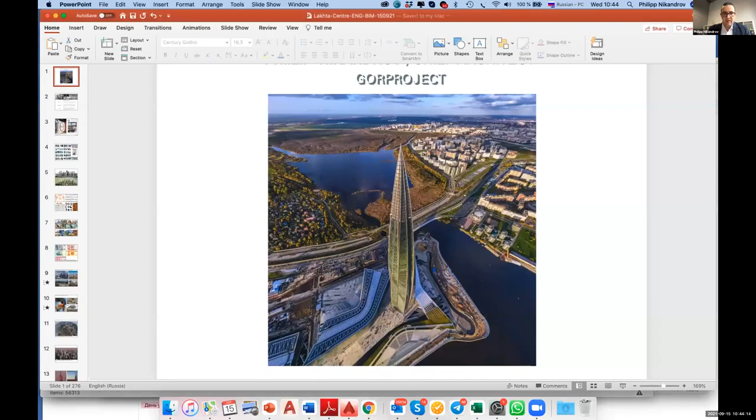Let me introduce myself. My name is Philipp Nikandrov, and thank you to the chairman for the introduction. I represent a company, Gorproject. This is a group of companies. We are one of the leading Russian design companies. Over 300 designers, architects mainly, and structural engineers, MEP engineers. But also we have daughter companies, United Facade Company, dealing with complex facade design. And also one of our daughter companies, BIM Academy, which was established quite a long time ago.

We're a relatively young company. We've been on the market over 15 years, but we were one of the first companies in Russia introducing BIM technology in the design process. And our BIM Academy was involved in many educational projects. So mainly it's educational, but it also helps us a lot to design and teach our colleagues in-house. But also we invested a lot in popularization of tall buildings and high-rise buildings.

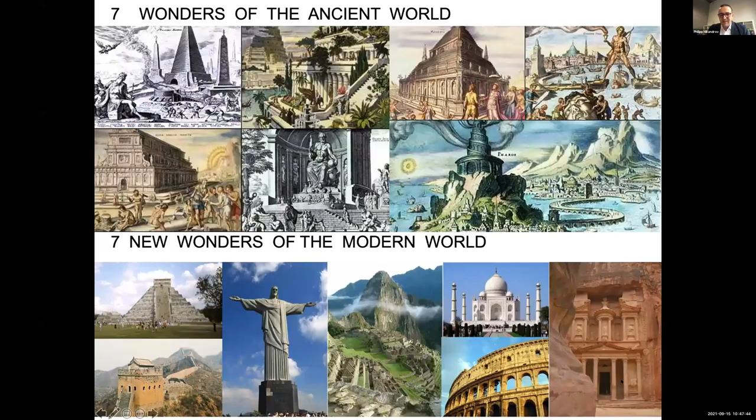Icon, of course, is a symbol. So when we call a skyscraper iconic, it's a symbol, like the 7 wonders of the ancient world, or the 7 new wonders of the modern world, and many wonders in many countries. And now it's about size, about height, and skyscrapers are definitely the flagships of the construction industry, and many nations are proud of their icons and publish them on banknotes, postcards, and stamps.

And of course, sometimes it's a target. We just recently remembered the great tragedy of the September 11th attack 20 years ago. Skyscrapers were the target, similar to the Temple of Artemis at Ephesus, because skyscrapers are such strong and powerful symbols of ideology and economics and nation, the power of an empire.

But also, skyscrapers are just a typology of buildings, and most skyscrapers and high-rise buildings are built not as a symbol, just for money, to get profit. But on this skyline of skyscrapers, some of them are higher and more significant, and they are landmarks, and they have to be vertical dominants amongst other vertical dominants. So basically, when you have high-rises all over the city, like Hong Kong, Shanghai, Dubai, some of the towers are more significant, and they have to be treated as symbols.

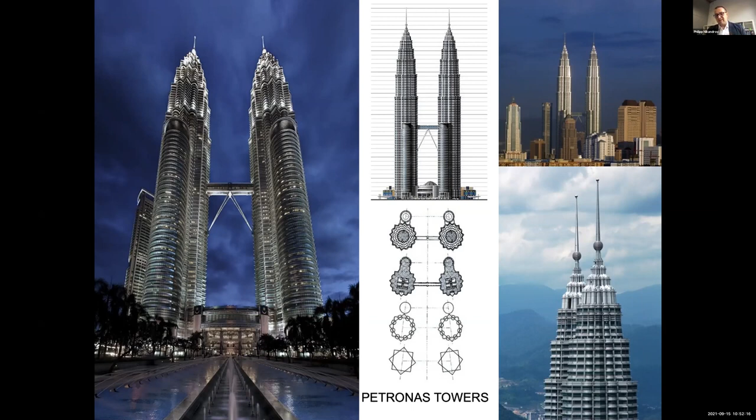In this building in Kuala Lumpur, the Petronas Tower, a symbol of contemporary Islamic architecture based on an Islamic pattern in the plan, it's a very ornate plan, but it's repetitive. The beams are similar, the columns are similar, the floor height slab to slab. So it helps to prefabricate, design quickly and build quickly.

But at the beginning of the 21st century, you have buildings with more difficult shapes to design and build, more complex, with much fewer repetitions. Some of them are mega skyscrapers like these two, Burj Khalifa and Kingdom Tower. But in Burj Khalifa you also have tiers with repetitive design, one above another, and again, repetitions help to design and build.

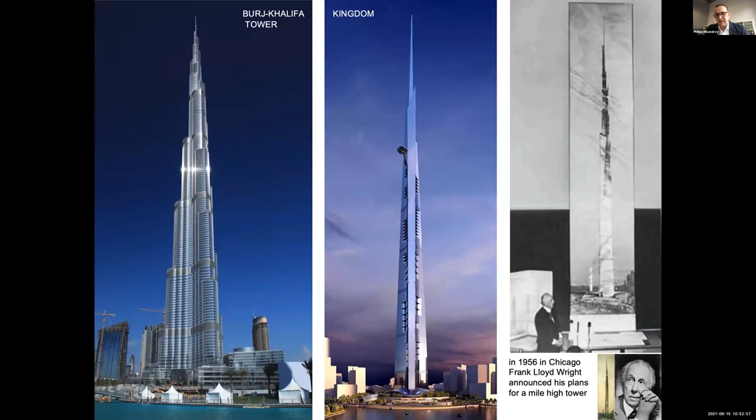The tallest 20 towers in the world, what we call megatall, are above 600 meters, mostly built in Asia, in China and Dubai, the Middle East, but none of them is in Europe. European towers are smaller. Most of them are in Russia, in Moscow or St. Petersburg, but also London, the Shard, and Frankfurt.

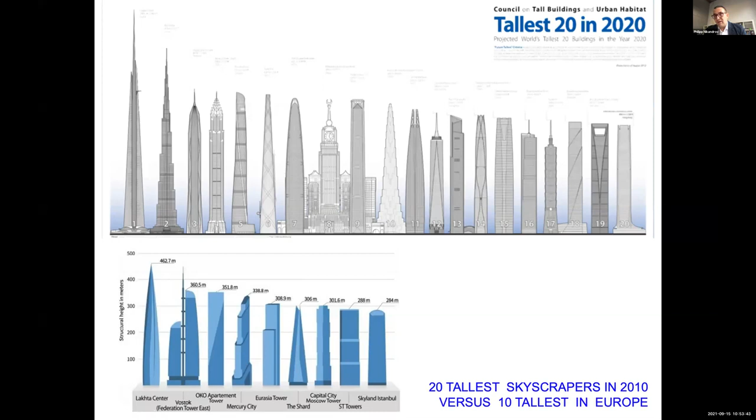In Russia we have our tradition of high rise, and we entered the height race in the 20th century with the Palace of Soviets, which was supposed to be 400 meters tall. Construction started in 1931, at the same time the Empire State Building was finished. But only the basement and lower levels, maybe the first floor, were constructed when the Second World War started. Construction was terminated, and the structure was dismantled for fortification uses.

The second landmark, actually successfully finished, was the University Tower, which until the 21st century was the highest tower in Europe, 240 meters. And the Ostankino TV Tower, 540 meters. For 9 years it was the highest structure in the world, built in 1967, which is 54 years ago.

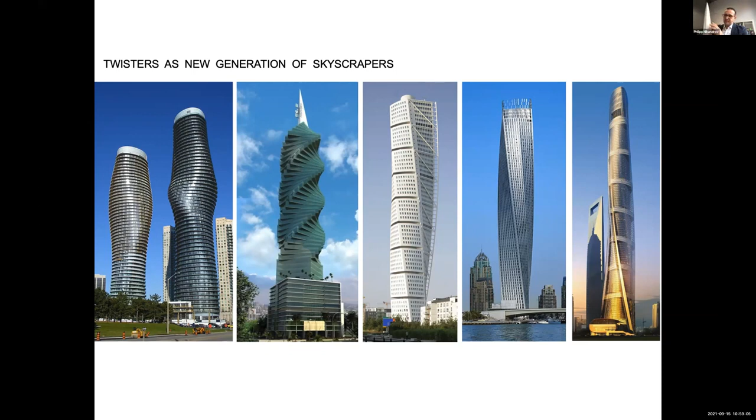Yeah, it's quite a bold twist, and as I said, it's the new generation of skyscrapers called twisters that we can design now because of BIM, because of building information modeling. We have these softwares to design it quickly and build it quickly. Before, without BIM, it would take many years, maybe 10 years to design, and a very long time to build. So this is a new generation, because we can build this complex geometry like Lakhta Center, which I will be talking about in a minute.

Again, Evolution Tower was quite simple. It's a very complex shape, but it's a simple idea. It's a straight vertical core and 8 columns surrounding the core and 4 corner columns. It was difficult to build the corner columns with a special shuttering design, but as you can see, it's a repetition. The same floor plate rotates 3 degrees, and it's simple. But again, you have to design each floor separately, and the reinforcement of each floor separately from other floors. So there is a repetition, but it's not that straightforward.

Lakhta Center Tower in St. Petersburg is a more complex shape. If you look, this is a scale model I have in my hands. It's an extrusion vertically, but twisting, tapering and bowing. So it bows and it gets into the pinnacle, into the point. All the mass gets concentrated in one point, similar to historical domes and spires.

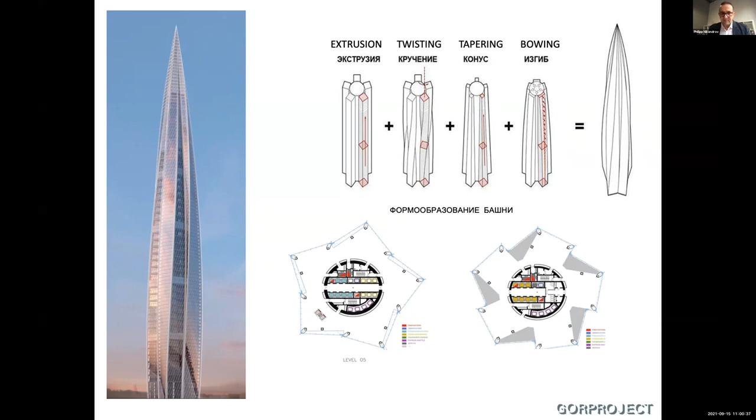These are some images of the completed project. It was finished a couple of years ago, but it's still under construction because of its large scale. Phase 2 is under construction: the embankment, surroundings, landscape and fit-out works. So it's not yet opened for operation, and the project took, of course, a long time. This is a night image with architectural lighting, and some of the aerial images that you can see.

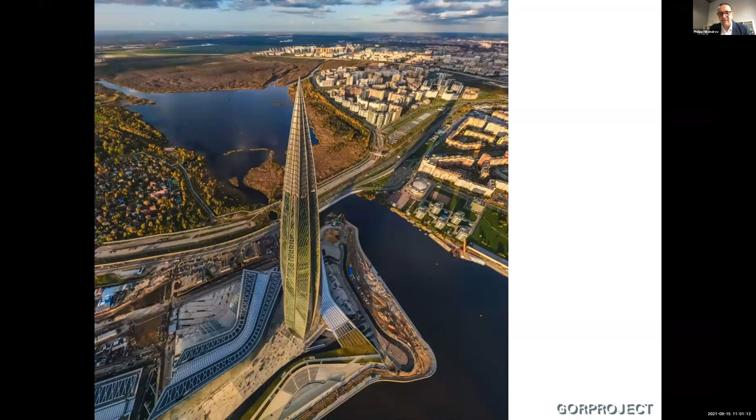Overall area is about 400,000 square meters, and gross lettable area about 150,000 square meters. The overall height is 462 meters, which makes it the highest tower in Europe. The main purpose is offices of Gazprom, the headquarters of Gazprom, moving from Moscow. But there are many other functions in the complex, including a science museum, an educational center with a planetarium, a quite unique 500-seat transformable multipurpose hall, and various supporting functions like fitness, retail, restaurants, and of course underground car parking for 1,800 car spaces.

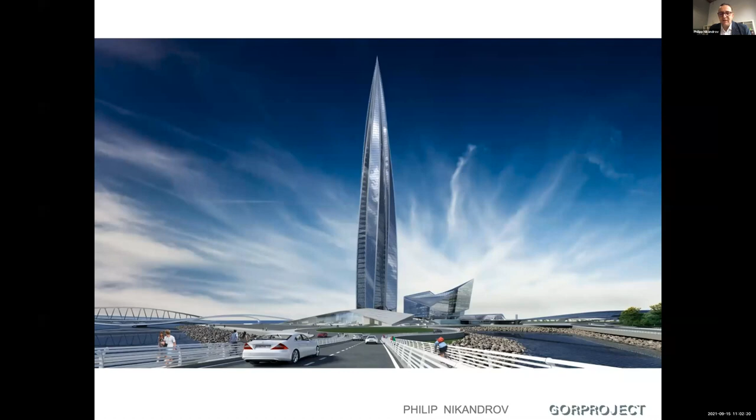One of the things we are proud of and quite remarkable: the tower was certified LEED Platinum by LEED, which is one of the major ecological green organizations responsible for certification of green buildings. The tower received platinum, which is the highest degree, and the base podium buildings around it, called the Lakhta Center multifunctional building, received gold.

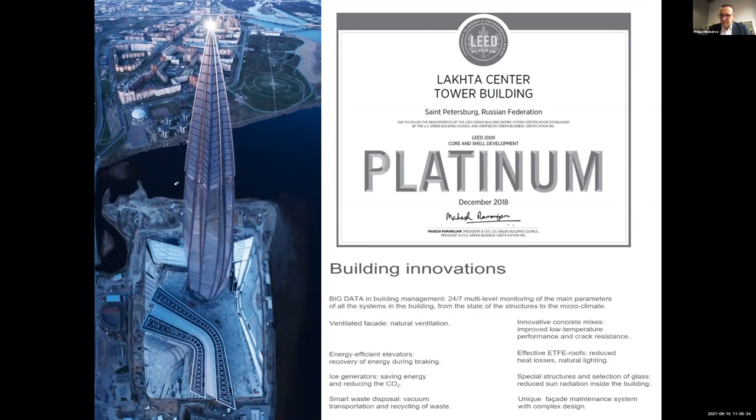Big data in building management is multi-level monitoring of all parameters of the building and state-of-the-art engineering. We have a double skin ventilated facade with natural ventilation, and energy efficient elevators which recuperate and recover energy during braking. Also, we have ice generators saving energy, and a very smart contemporary waste disposal system with vacuum transportation and recycling of waste. And we have a lot of innovation in the facade and in using an ETFE roof, which is a synthetic material, not glass. Of course, the facade management system, BMU, which we basically had to invent because it was not on the market, to service this very complex shape of the tower.

It's a view from the top. But the history of the project is quite interesting. Started in 2006, Gazprom established an international architectural competition, inviting 6 teams, famous architectural studios like Daniel Libeskind, Jean Nouvel from France, OMA from Netherlands, Herzog de Meuron, Switzerland, and Fuksas Associati from Italy, and RMJM London from UK.

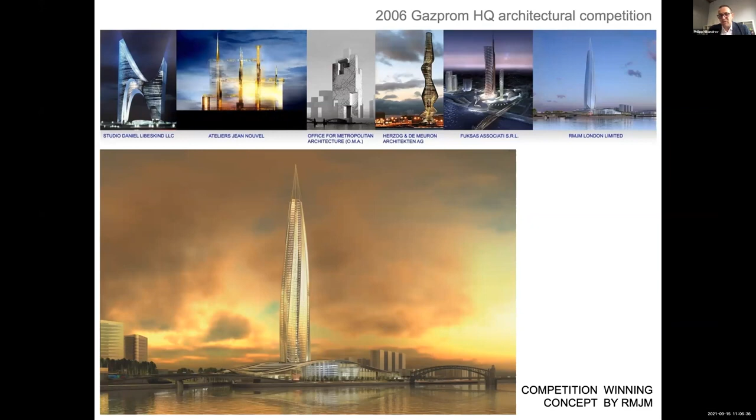And I was director at RMJM at that time, and was a chief architect in this competition entry and later. But the site for this project was different. It was closer to the center, 5 kilometers from the city center, on Okhta. Later the project has been replaced. So if you look at St. Petersburg, this is a St. Petersburg map or scheme diagram showing the boundaries.

St. Petersburg includes actually 9 cities and 21 villages, and the central St. Petersburg, which is marked up as red, historical, is a preservation area protected by UNESCO, a UNESCO World Heritage. And the actual site is here where Lakhta Center was built, but the original site was in there, so it was slightly closer to the center of St. Petersburg.

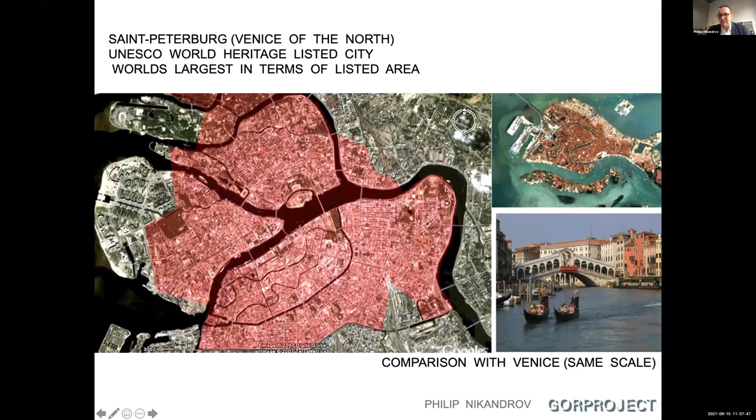And the center of St. Petersburg is really huge. So if you compare the historical center of St. Petersburg, which is marked up red here, to Venice. So this is Venice. It's a real site. The entire Venice is much smaller than the preserved St. Petersburg area. The first site was located in here,

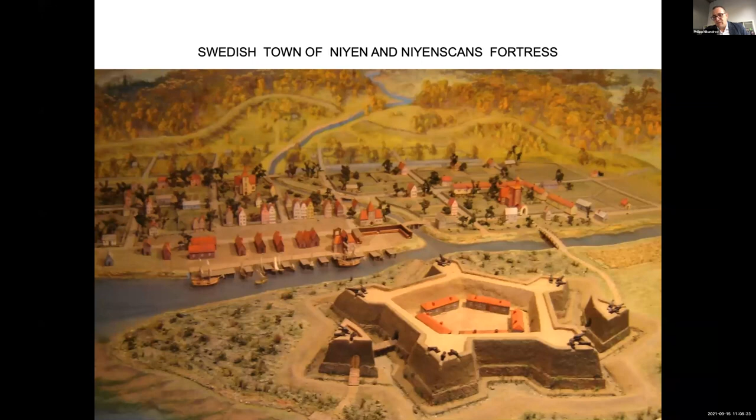but it was actually at the place of an ancient Swedish fortress, and the later fortress of 16th and 17th century called Nienschanz, which was demolished by Peter the Great. So some of the archaeological remains are there, and this was one of the reasons of objections to build here on this peninsula. But actually the shape of the fort was inspiration for the design.

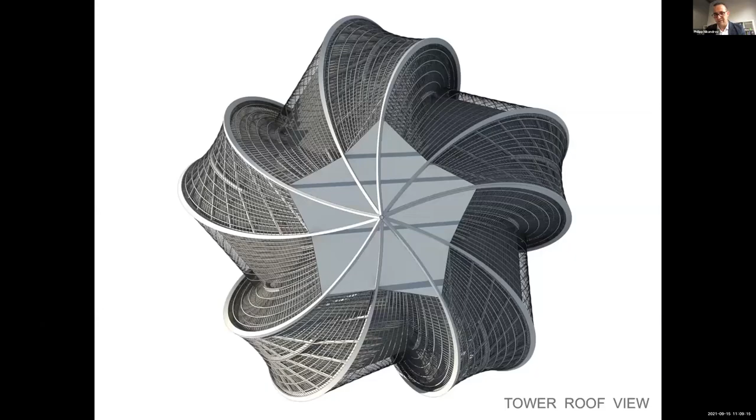In general, the silhouette of the project is a flame. The flame is a logo and symbol of Gazprom, of course, the blue flame. And we have a flame.

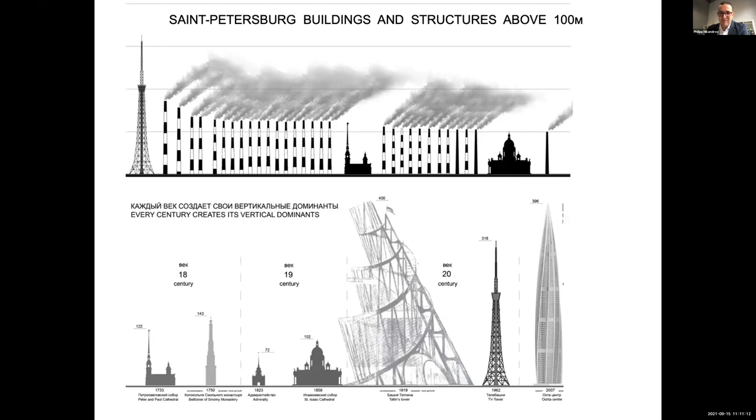In St. Petersburg, we have many vertical dominants, and most of them are not very pleasant, like these chimney pipes. This is a big industrial city, and we have port cranes, but also a TV tower, which is over 300 meters tall, and in the center we have domes and spires. So St. Petersburg has a different skyline, and it was important to have the major symbol be the tower rather than a TV tower or chimney pipe.

So the project actually relocated 9 kilometers to the west due to UNESCO demands. The major concern was the proximity to the Smolny monastery over here. So the tower moved far away. It is now in the Lakhta district in the northwest of St. Petersburg, and it forms a new marine facade. You can see the football stadium here and a new suspended bridge.

And this is a new district, and the Lakhta Center is a generator that will generate developments in this new part of the city. Of course, the port as well. The new marine facade includes the new passenger port for liners arriving to St. Petersburg. And the first thing that meets you in St. Petersburg would be Lakhta Center Tower, which is a flagship and a lighthouse on the Gulf of Finland.

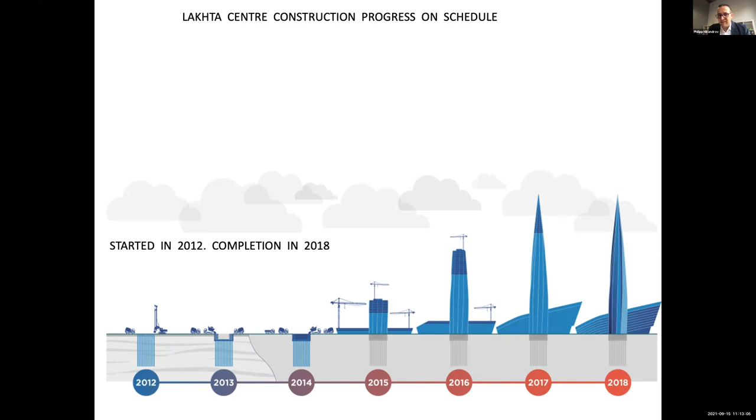So after relocation of the project, construction took about 6 years to complete the envelope, the structure and services by 2018, with some breaks, changing the main contractor in 2014 and 2015. Originally Arabtec and then Renaissance, a Turkish company, as main contractor, and Arabtec built foundations with Bauer Construction from Germany, in 2012 and 2013 finishing the basement foundation of the tower.

The location of the project actually works in the antiphase of the traffic flow. So it actually helps to reduce the traffic flows in rush hours, in peak hours in the morning and evening time.

Because of the location, this is over 2,000 car spaces, but not in the city center. It's actually outside. So the cars from the city center in the morning would go to the outskirts, which is in the opposite direction. So it actually helps a lot to reduce the traffic problems in St. Petersburg.

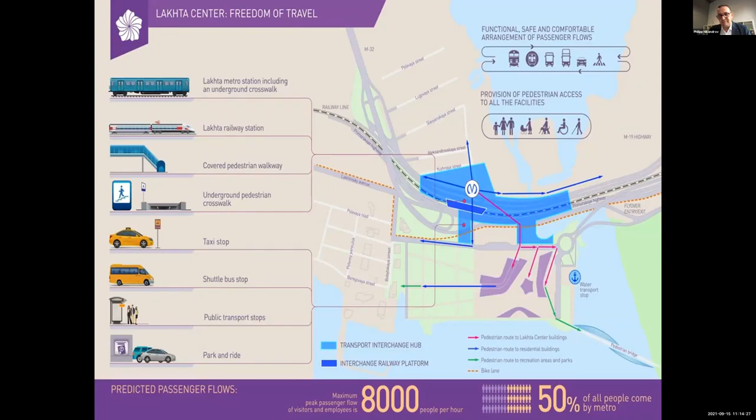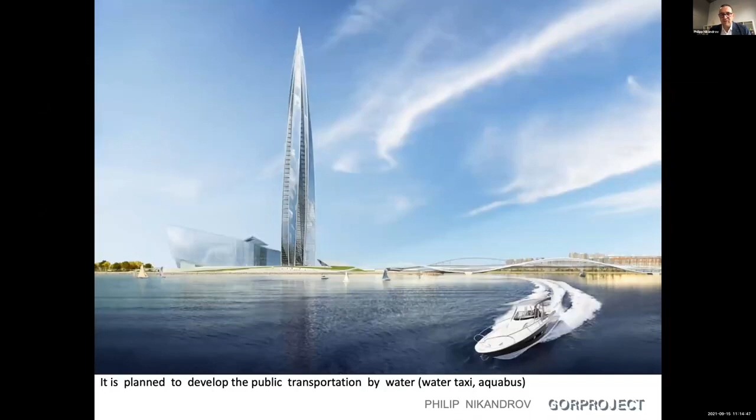But potentially it's in a plan to arrange a transportation hub, including metro station and railway station, and also using water transport, like water taxi, and of course various modes of public transportation that include buses and metro in the area. And we also designed this pedestrian bridge, but it's still the dream to connect the park and the new construction site together, and use this water transport for the future.

So we talk about construction and the design, but the public uses are deeply integrated. The project is integrated into the idea of a city on the water and river, embankment, the amphitheater and stage open to the water, to the Gulf of Finland, and you can watch regattas, windsurfing, yachting, and various entertainment and performances on that stage. So it's an important part of the life of the district.

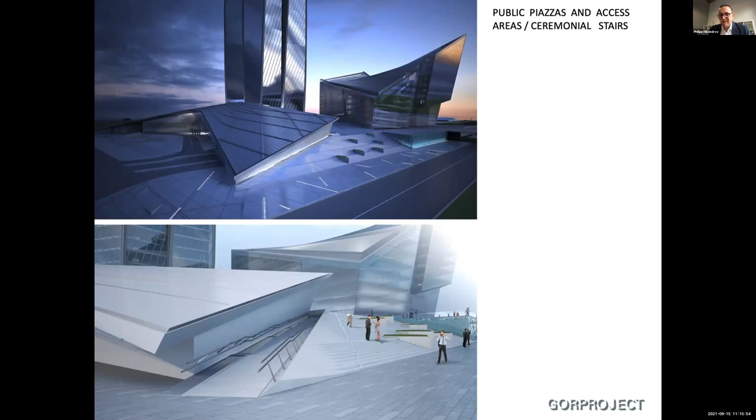And of 8 hectares of the first phase, most of the area, about 6 hectares, is open public piazzas. So 3 public piazzas, landscaping, water features, greenery.

So we fly around by copter. With the shape of the tower, we don't have any repetitive floors. Earlier I explained that the tower gets extruded with twisting, tapering, and bowing. So we have no repetitive floors. On each floor, if you look, we have rotation, twisting of each of the 5 wings. And so it gets smaller, and also changes in the core.

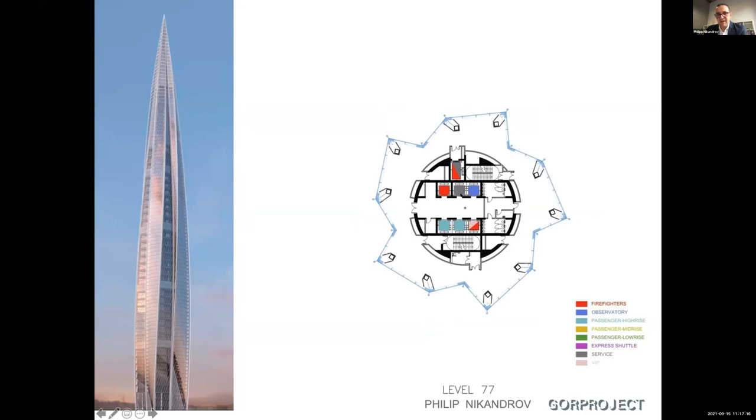And various uses as well. We have plant levels. At the top, we have a rotating restaurant. We have an observation deck on the top, and we have offices and meeting rooms and various functions. So no repetitions whatsoever. And if you take the entire project, there is no repetitive level. The total number of floors is 87, and the number of levels is over 100, 101.

Basically, it's the most complex project in the world. Really, it's the most complex skyscraper and maybe project in the world, because of this number of floors and non-repetition. It means that each beam is different. So on this floor you have, for instance, 30 beams, but these 30 beams will never repeat again.

On the next level again, the columns are different, because columns are not straight vertical. They are inclined negatively or positively, and you have to design these columns differently, the plates for fixing to the next column and changing angle, very precise. It's mostly steel work and composite structure. The core is concrete, so mainly the structure is a concrete core, steel beams, composite columns, and metal decking of floor slabs.

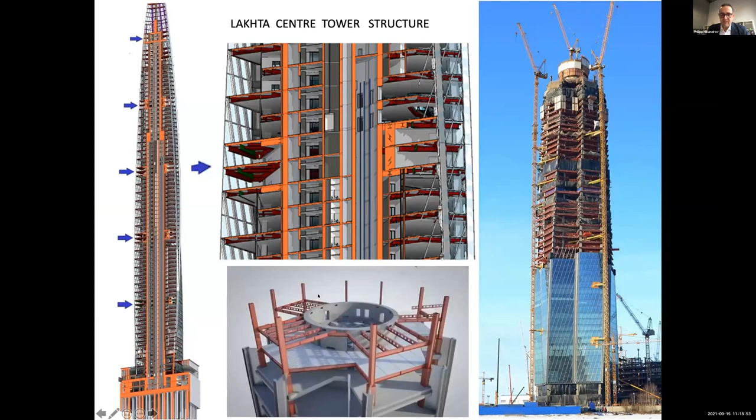And this was modeled, again, with lots of simulation. To design this very complex structure, you have to do a lot of computer simulation. For instance, wind is a major problem and major enemy of high-rise buildings. You have to design for stiffness, for sway, and we have this central composite core, reinforced concrete, that takes all the load, and 15 columns that become 10 columns at the top, and 4 levels of outriggers.

Outrigger levels are steel frames. This is an outrigger. An outrigger is the element that connects external columns to the core by means of these fins. The fins are actually steel trusses. So imagine, again referring to the September 11th attack 20 years ago, this building having 15 columns at the bottom. Of course, we had to take into consideration new requirements post September 11th attacks, progressive collapse in structural design.

But this tower is definitely one of the safest in the world, because if you explode all 15 columns at the bottom, the building will not collapse, it will stay as is, because these columns will hang from the outriggers. So 4 levels of outriggers support these columns. And even if you explode 1, 2, or all 15 columns, the whole vertical load will be transferred to the central core and to the foundations.

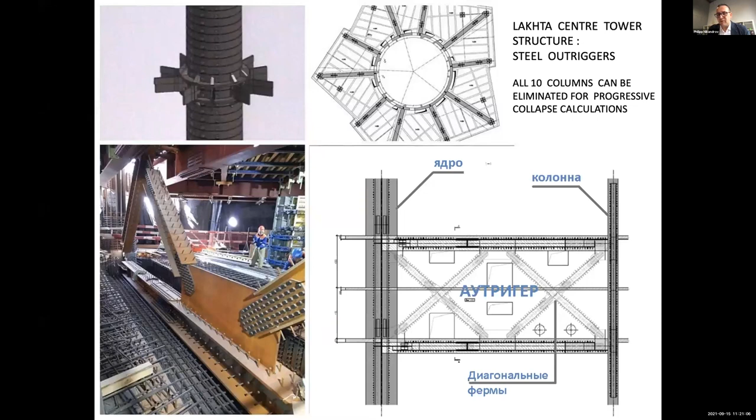And the central core has 4 hours fire protection, so 4 hours of fire, which is more than enough to evacuate, to actually escape from the building, from the highest floor. You don't need that long. 4 hours is quite long to sustain.

So that's a construction process. You have the central core that is in concrete, so it gets extruded by this special shuttering by PERI, and the steel work surrounding it. And of course, columns are composite, which was unique for Russia. We had to develop special technical conditions, as well as the new regulations in Russia for the composite columns. They're actually cross-shaped, and then concreted, surrounded with studs actually welded into the body of the column.

And this is, you can see the studs. These are steel like bolts welded into beam. So that is what is called composite structure with metal decking and fire protection below. This is fire protection. So 2 hours for the beams and 4 hours for columns.

Again, this is about 2 times the NFPA requirements. NFPA requirements, which is American fire regulations, is 2 hours for fire protection, and we have 4 hours here. So basically, it's not excessive. It's actually safe. It provides greater safety for the structure.

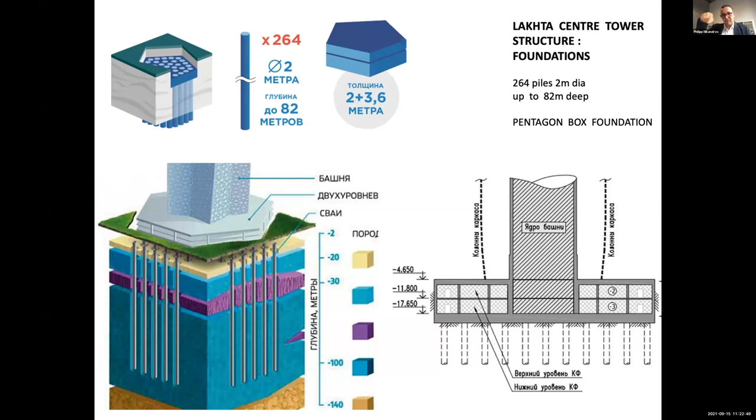The foundations are also unique for Russia, very deep, 82 meters deep piles, 264 piles, circular shaped, 2 meters in diameter, bored in because of very weak soil in St. Petersburg, actually founded on swamp in the delta of the Neva River. The piles had to go as deep to actually reach the stronger level of ancient clay, to get supported from below. So it's so-called hanging piles.

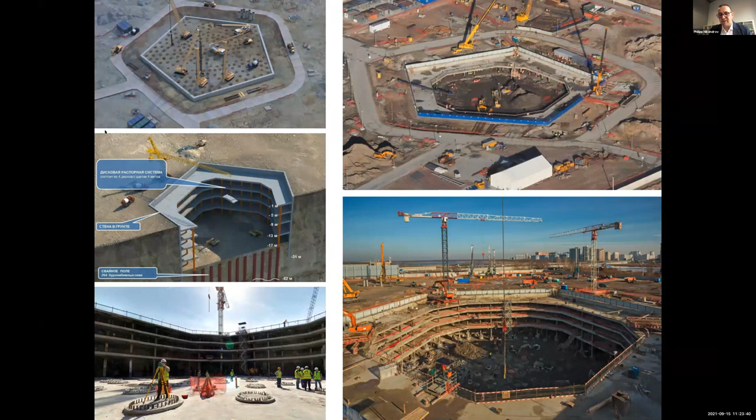Total number of 264, and the foundation shaped as a pentagon, which is that shape. And this pentagon is spread at the large area, by means of the central core and concrete fins. This is a shape of foundation, and this is a pile. This is a pile diameter. You can see 2 meters pile in the metal tube.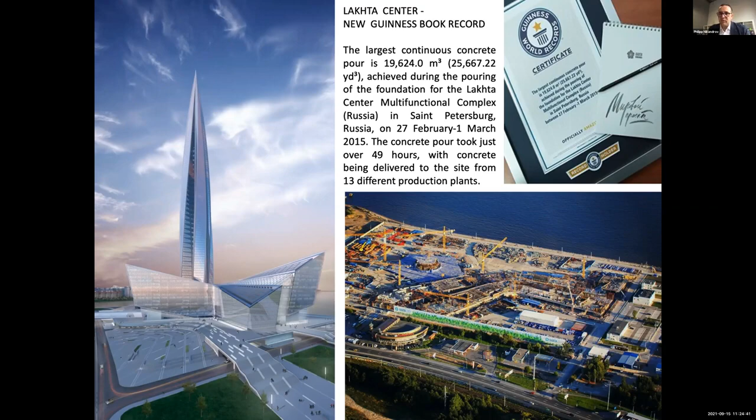The Lakhta Center foundation pouring was actually registered as a new Guinness Book World Record. It was the largest continuous concrete pour. It's about 20,000 cubic meters uninterruptedly, 49 hours concrete being delivered to the site from 13 different production plants in St. Petersburg, breaking the world record and making a new world record for the Guinness Book as the largest one pour foundation in the world.

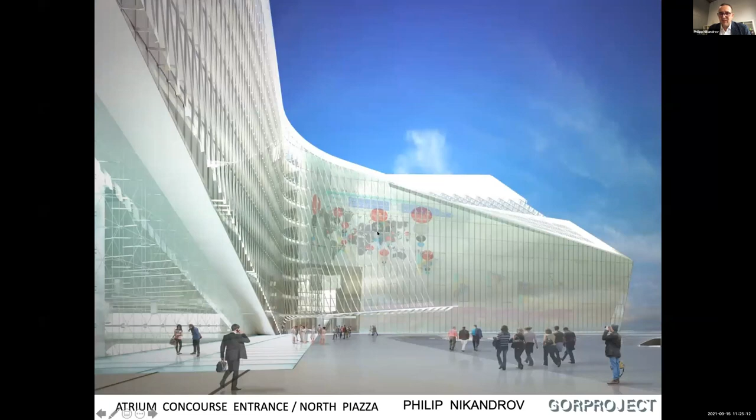The facilities include the tower and the base buildings here. You have the entrance arch and also the 2 blocks connected with an atrium 250 meters long. Some of the images, you can see here our representation of the media screen, but actually this is a media screen being tested. It's actually also completed, a very large media screen at the entrance, and again atrium and spaces. And here under construction, this has been fitted out.

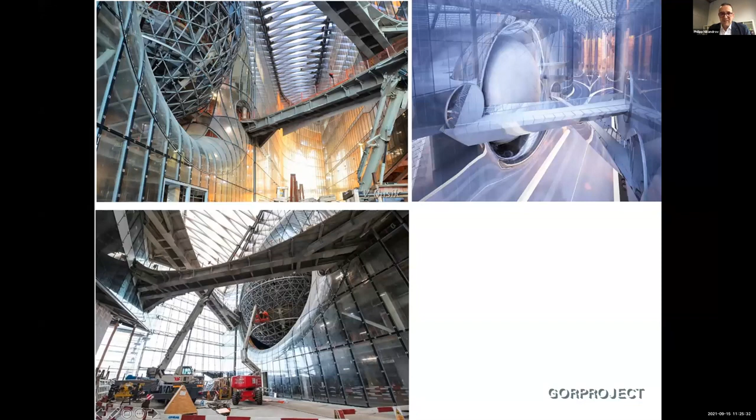This is a planetarium ball, curved glass, and lots of nice and sexy architectural elements here. And you can see on images some photos of construction as well. So it's very complex geometry. It's not orthogonal. Everything is curved, really. It's curved glass canopies, curved glass steps at the entrance, and the supporting elements.

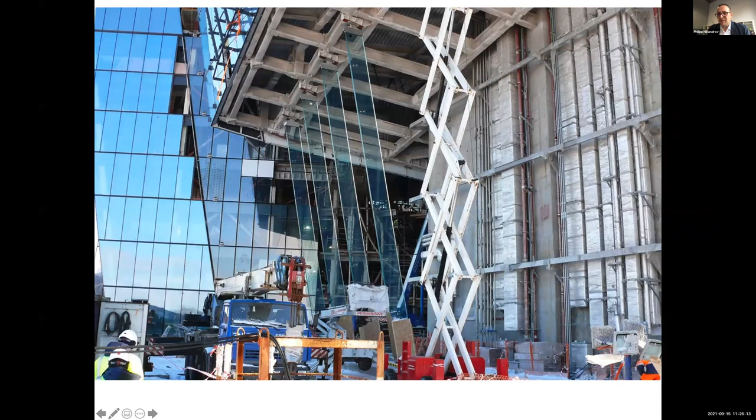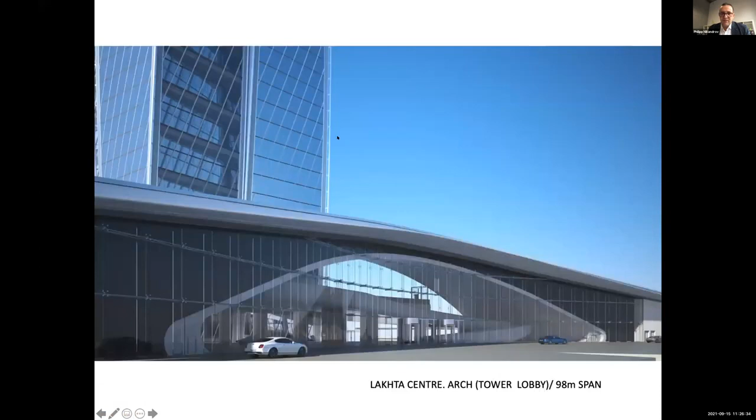For instance, this curtain wall gets supported by glass, not by, normally it's aluminum or steel studs or mullions, but here it's glass. It's one of the highest in the world, 17 meters. One piece of glass, 17 meters, one of the highest in the world. The glass elements are fixed to the steel, and they actually hang from the steel. So it's a very unique energy efficient double skin facade, but also glass fins supporting up to 17 meters.

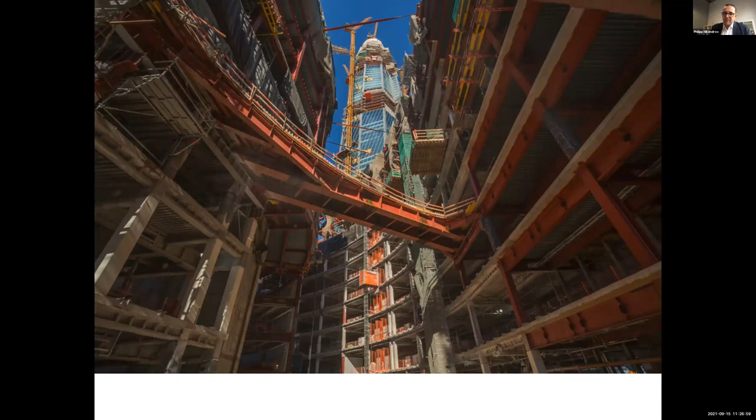And a lot of steel arches and steel frame of the base buildings here. As everything is in steel, composite structure with reinforced concrete core and steel with large cantilevers up to 36 meters, 40 meters, and arch span about 98 meters with bridges. See the bolted connections. And for the facade envelope, we had to manufacture the mock-ups, and also the roof of the base buildings is actually quite unique.

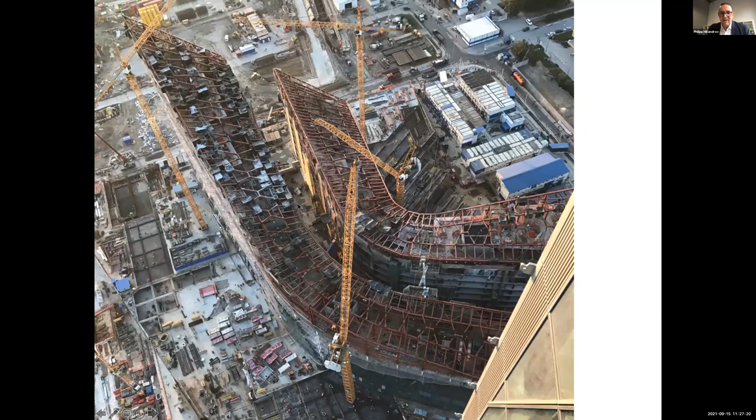It had to provide the shadow as a requirement for LEED certification for green buildings. But as well, the skylight is not in glass, it's in ETFE, which is a film, cushion, inflated, and it helps to reduce energy for heating otherwise if it's glass, right? So it replaced glass to reduce the energy consumption, and the cover of the roof is also for the LEED standard. As a requirement of LEED, the heat island effect, we had to have this roof providing the shadow as a mesh, aluminum mesh.

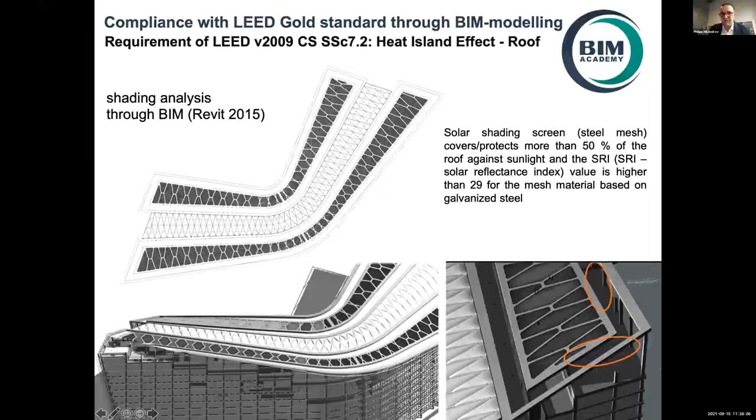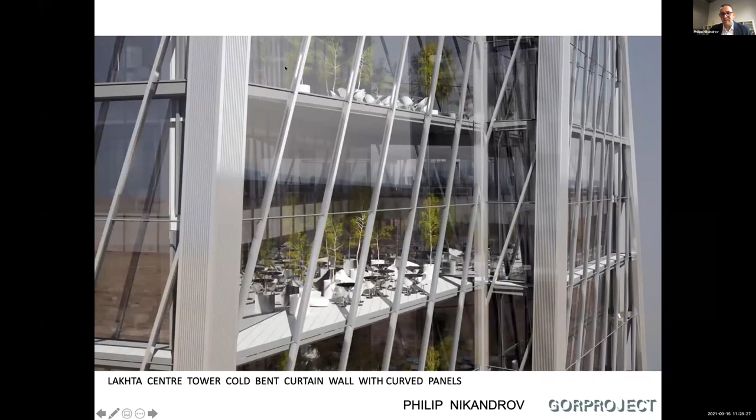The facade, we started from triangulated panels. This is a real scale model like mock-up. And finally, from the triangular facade, we ended up with a cold bend like here with large panels, helping to reduce energy consumption. So actually, from this facade in Lakhta Center, very large panels and cold bend as an evolution

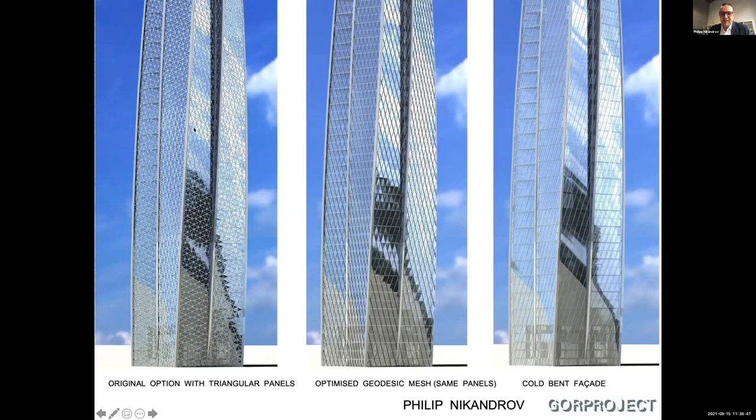tower. The same technology, we used the same facade contractor from Germany, Gartner. This is the evolution of facades. So small triangular panels, larger panels, and really huge panels of about 11 square meters, each panel of glass, with a double skin facade, naturally ventilated through the corners, and special detectors

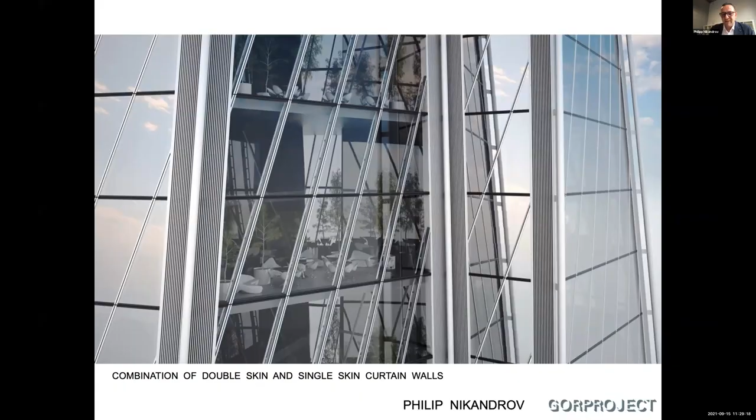operate the vents to open in overheating and to close in colder temperatures to close this facade. So this buffer zone gets naturally ventilated in overheating and completely sealed for the greenhouse effect, reducing the energy demand for winter, for the colder months through winter.

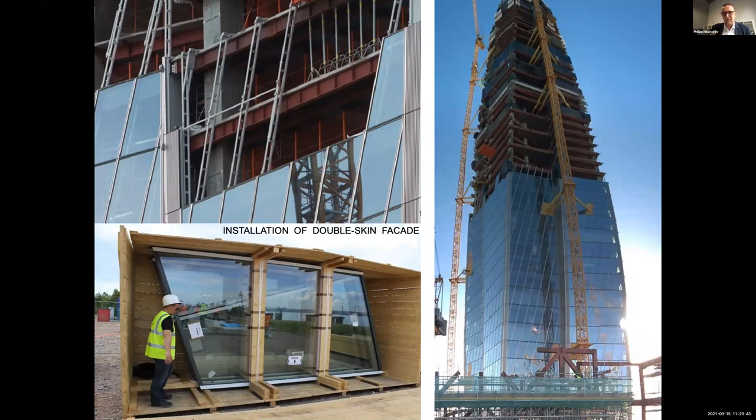This is a view of the buffer zone, and the facade installation, as I said, 11 square meters each panel, and it's actually cold bent slightly so the whole facade is curved about 90 degrees through the height of 400 meters. Again, this was modeled in a mock-up. Not everything you can model by computer, right? You have to see the actual quality of glass and the reflections in reality.

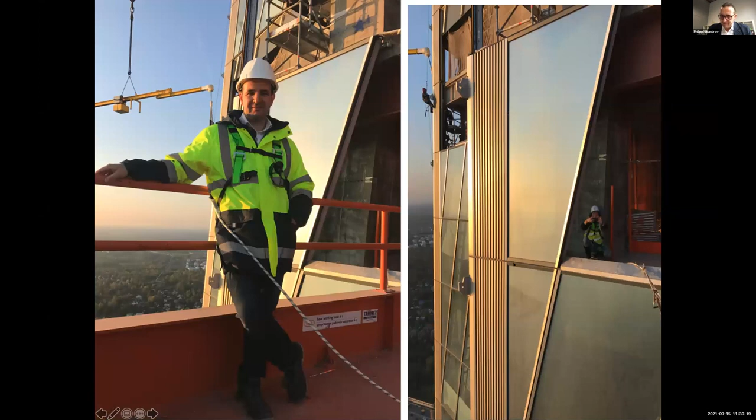So we had to build these mock-ups, and this is a cold bend, as you can see the effects of cold bent glass. It's a very, very smooth transition of light and reflections of sky, and really big panels here. But also a unique invention of the engineering corners with lighting integrated into the architectural lighting and BMU, which is the building facade management and maintenance system.

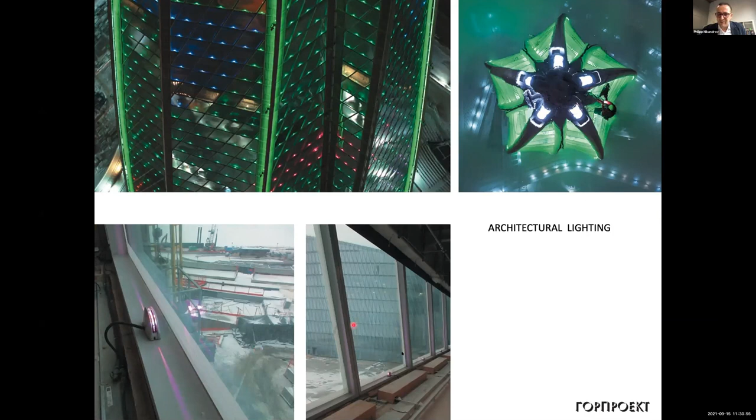Architectural lighting is also unique. It's designed with a special element, so the colored light doesn't go into the offices. It's only the frame of the facade that gets lit, without any intrusion into the office space and comfort of the office. There's some of the videos of

Of course, a lot of this had to be modeled in 3D before it gets to the order and to the construction site. The facade maintenance, because of this complex shape, cannot be serviced by a simple crane. So we had to design a special system that actually moves parallel to the facade without any damage to the facade.

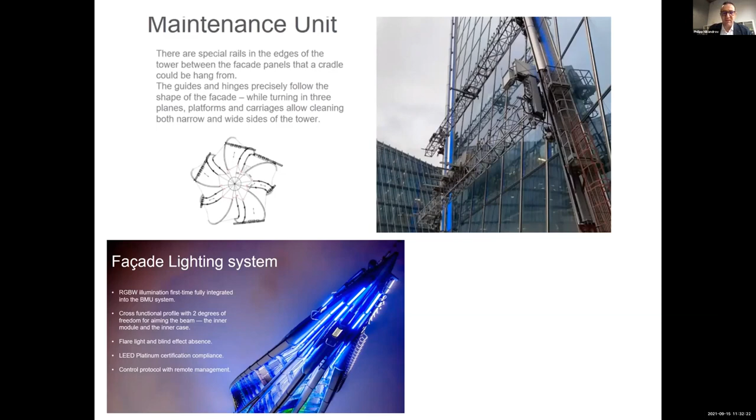So the maintenance unit consists of these platforms on rails. The rails are integrated into the facade. They are sort of hidden. You cannot see them, but the system actually reaches these rails through the rubber seals. And you have these 2 tiers of maintenance unit that go up and down, and it's telescopic, so it gets extended or reduced, fixed to this corner rail. With a special self-leveling system, it always stays vertical.

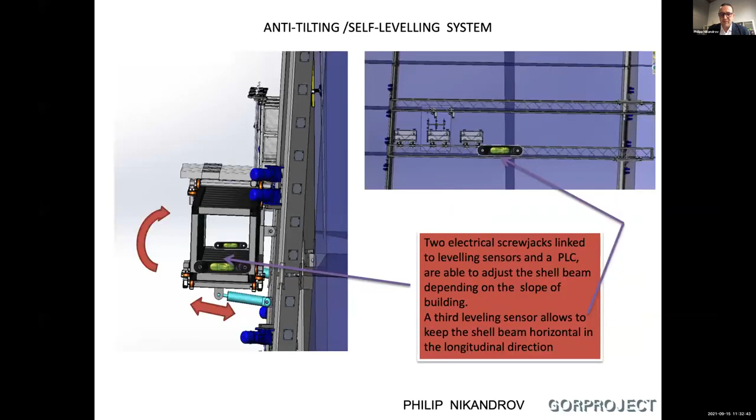So none of the towers in the world would have this thing. As I said, it was invented. Some of the drawings, how it works. But the spire is also unique because you have the top 100 meters architectural top, which is decorative, of course, but because it's hidden sometimes in the clouds in winter, the risk of condensation, the risk of ice formation was very high, so we had to model it.

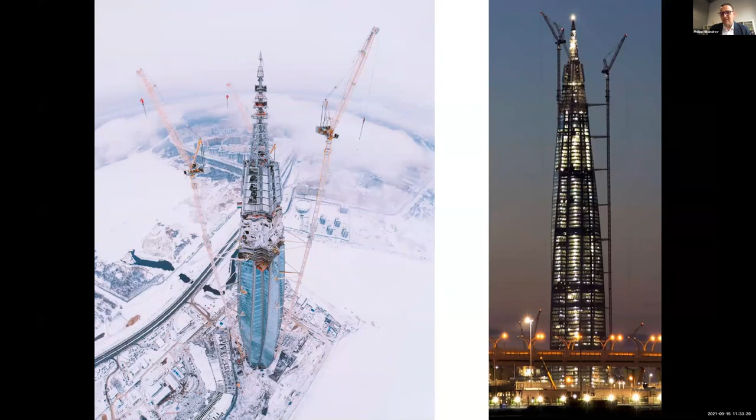This is in construction. You can see all the structures in winter covered by a thick layer of ice, and the icicles are a real danger for the tower. So we had to deal with the heating of the facade, which gets operated and detected by special detectors used in aviation for the ice formation on the wings of the airplane. So the same technology was used for the spire.

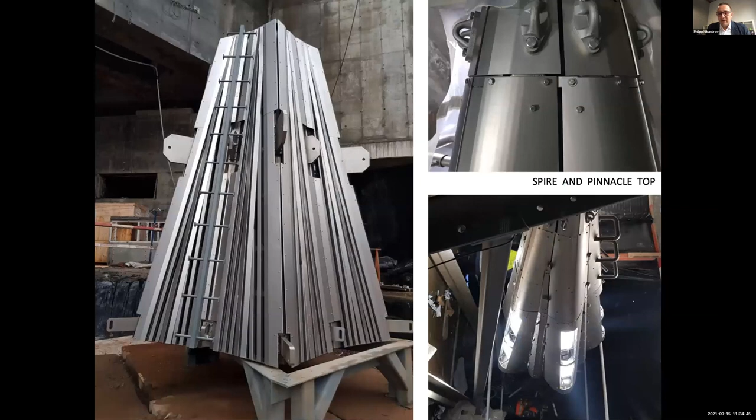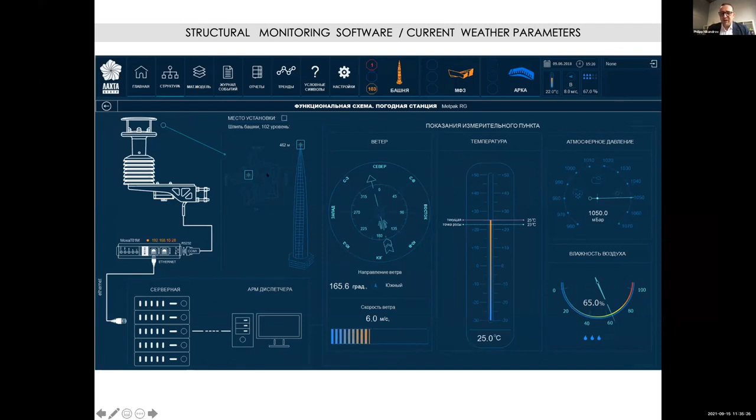And this is a structural monitoring software, and part of it is actually current weather parameters. So at the very top, you can measure the wind speed, the pressure, the temperature, and various other parameters that are an important part of the monitoring.

And of course, we designed it through BIM. It was in Autodesk Revit, level of detail up to 400. And we created over 6,000 new families of objects in the federated design model with centralized control management. And as a multidisciplinary company, we had to coordinate all design disciplines, architecture, structure, and MEP in this federated BIM model.

Just to illustrate structure, MEP, engineering systems, and this is for the tower. The very complex, all engineering systems in one, as it goes from the bottom to the top.

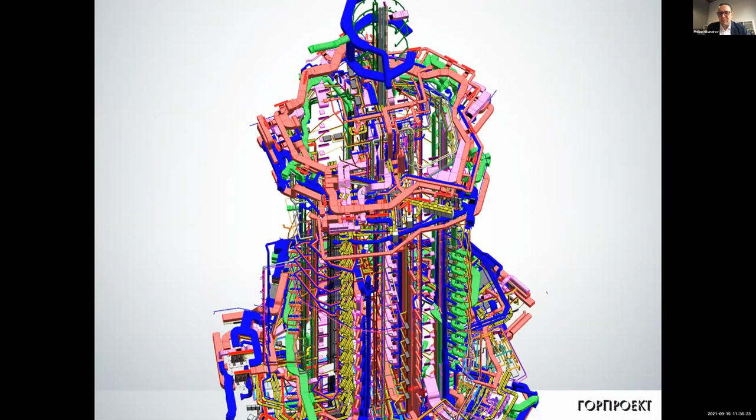And of course, the major element is a collision check as a part of the process and the protocol to avoid those collisions. So the collisions may occur only in the design process, not at the actual construction. So due to BIM, we managed to have a very, very smooth construction process, resolving all collisions in virtual reality rather than on site.

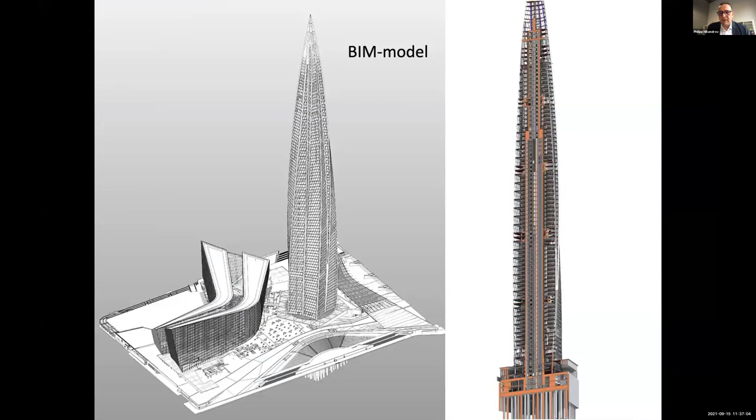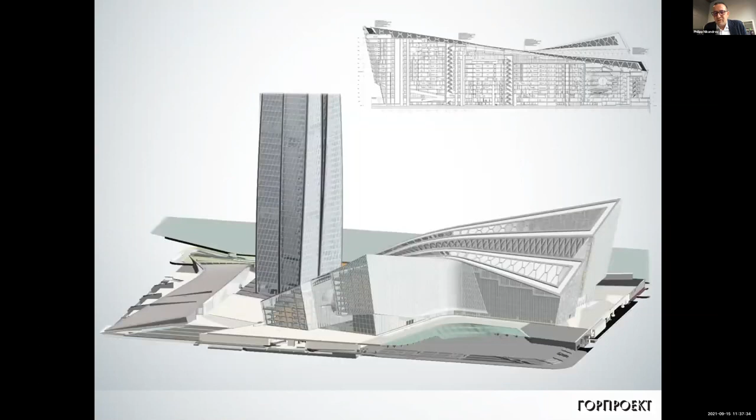That's a BIM model, structure and scheme, and MEP, so all combined. But not everything was smooth with Revit Autodesk. Of course, the facade contractors prefer to use CATIA, Dassault, software which came from the aviation industry from France, for the building fabric with a double curved envelope. And we struggled to build in Revit, but actually managed to combine Revit and Grasshopper, and through the scripts to actually manage the issues with the facade envelope and optimization of panels. This is a process we used.

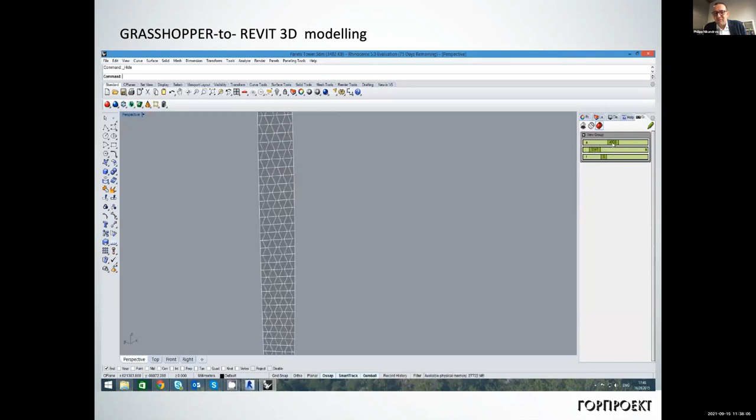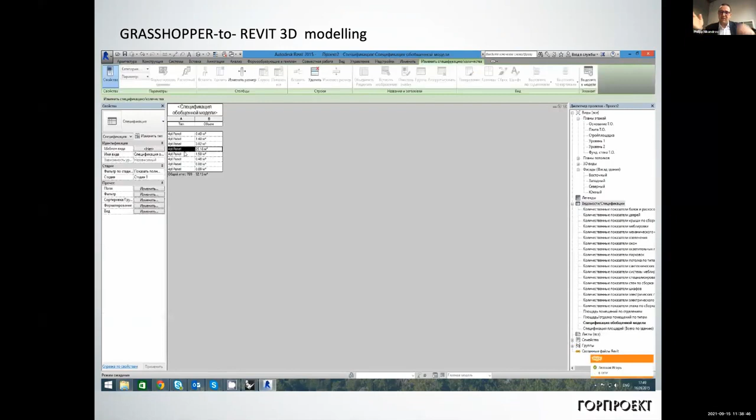So actually in Grasshopper and then importing to the Revit 3D model. But again, as I said, it was difficult to resolve this envelope in Revit itself. That's a process of optimization. You have many different panels, but the task was to optimize and to increase the number of repetitions. The number of repetitive panels, we have over 75%, and then 25% non-standard. But again, to find the solution, you have to go through and change the parameters of the unit, which is a double glazed unit, glass unit, before you import it to Revit.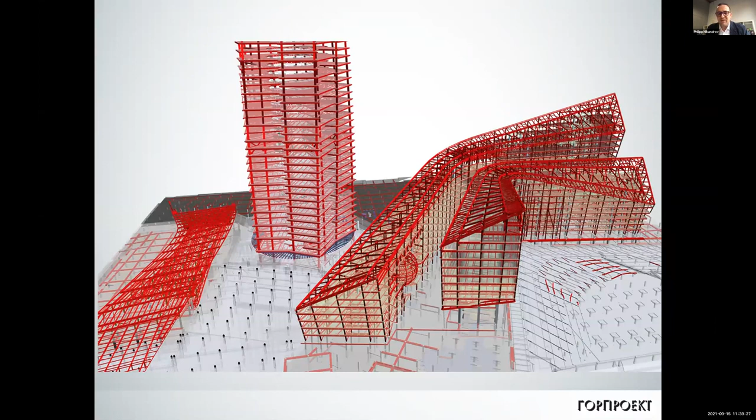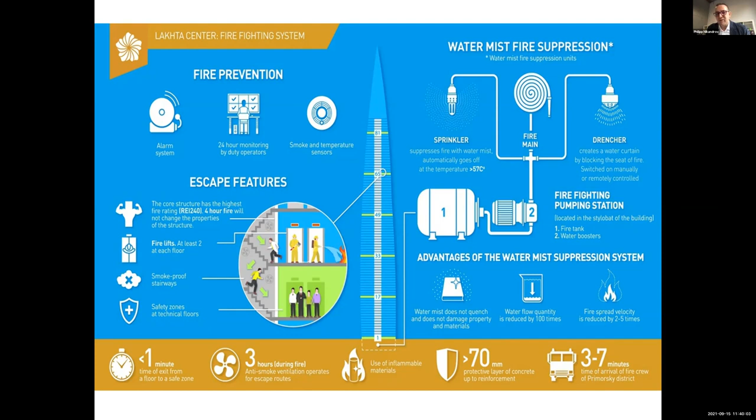The fire prevention system, we have, again, this different simulation of fire, and we had to use a very innovative system of fire suppression called water mist, which is not actually water, it's not a sprinkler system, it's a spray of water, which doesn't damage the computers, doesn't damage the furniture and the finishes in the room. Because normally the sprinkler system brings more damage than the fire itself, the water in the fire extinguishing process. And here we have this very innovative system, it's similar to a gas suppression system, but instead of gas, it's a vapor of water.

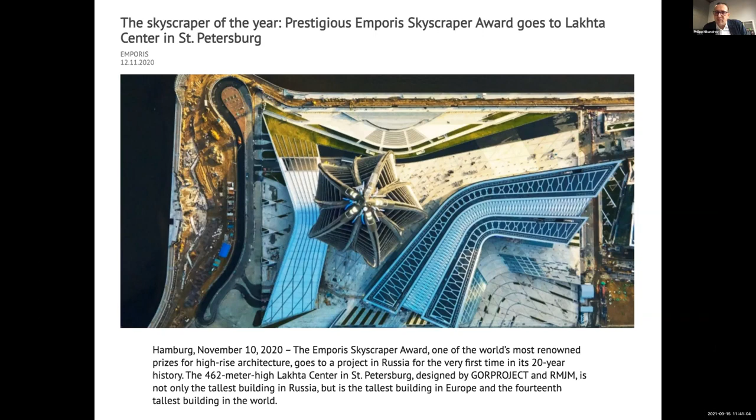Finally, Lakhta Center received many prestigious awards last year, in 2020. We received Skyscraper of the Year from Emporis. It was in Hamburg in November 2020, the Emporis Skyscraper Award as skyscraper of last year. This year, we received 4 awards, which went to Lakhta Center as best tall building 400 meters and above, best high-rise building in Europe, and best in facade engineering in the world. So it's a ceremony in Chicago. It was recognized as one of the best skyscrapers in the world.

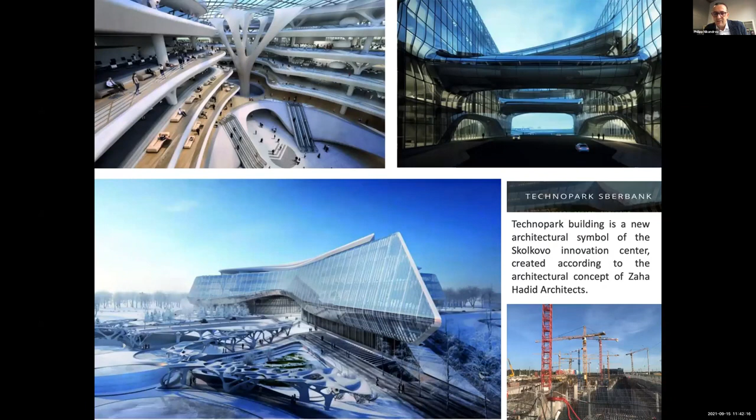But also we are working at the moment in BIM technology. We work on the ongoing construction of Akhmat Tower in Grozny. This is 435 meters. It's not as high as Lakhta Center, but almost there. It's under construction. You can see the foundation design. The architecture was designed by Adrian Smith + Gordon Gill, and Gorproject is the lead designer, general designer. We're working on the construction of Technopark Sberbank. Again, a very complex building. It's the last project by Zaha Hadid before she died. That's in Moscow, near Moscow.

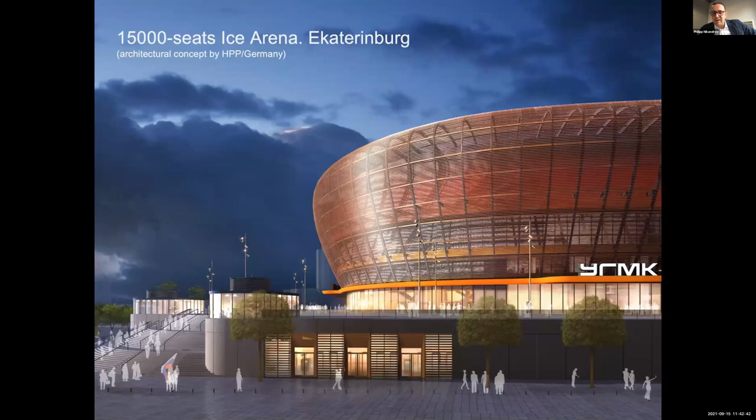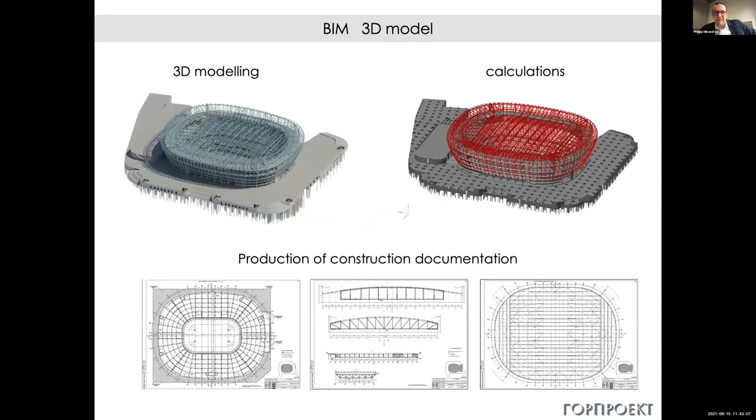And we work again on construction and design of a 15,000 seat ice arena in Yekaterinburg. Again, it's an architectural design by HPP from Germany, but we did all the schematic design and working documentation through the construction drawings, and it's all in BIM, of course, Autodesk Revit, as well as other software: Dynamo, Grasshopper, Star CCM+, and other software. So some of the images show you the foundation design, structure, 3D modeling, calculations.

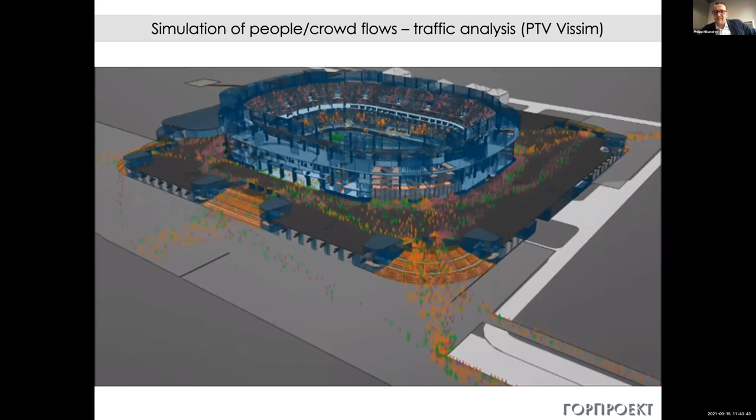And also even the traffic analysis for the crowds, for evacuation and escape. You have to model how people enter. And for this, the designers use PTV Vissim, the software helping in traffic analysis for the entry and egress, especially fire escape, for instance. This is a simulation of egress as people leave in normal mode or emergency mode from the building.

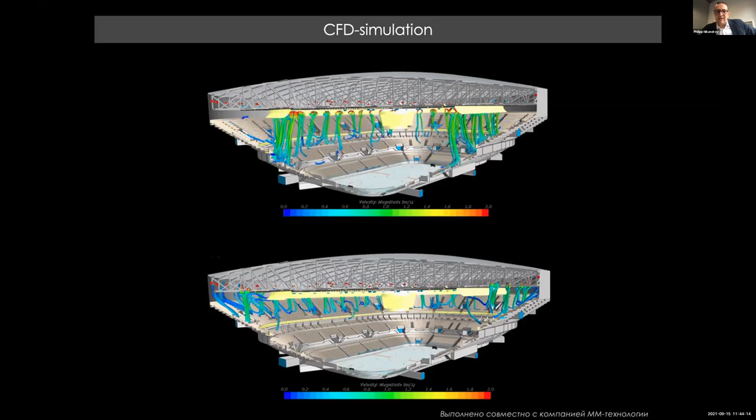And of course, interior and acoustics and the lighting had to be modeled, and the comfort of MEP, the airflows of heating and air changes in ventilation and the smoke exhaust. CFD simulations, computational fluid dynamics, for the temperature comfort and air changes, as well as smoke extract.

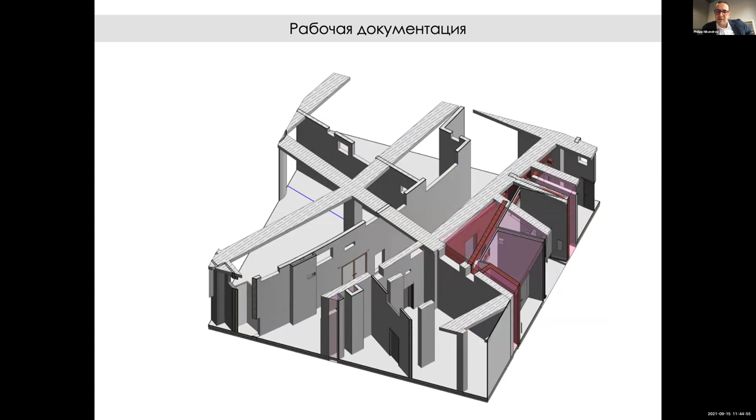Sound amplification, acoustics. Again, it's an important part of simulation, with software used by acoustic engineers for the sound. And overall working design documentation, construction drawings with Revit, coordination, collision checks, and coordination of every element here. Clashes between structure, pipework, ductwork, and cabling had to be checked in the BIM model rather than on the construction site. And this is the actual construction ongoing in Yekaterinburg of this arena.

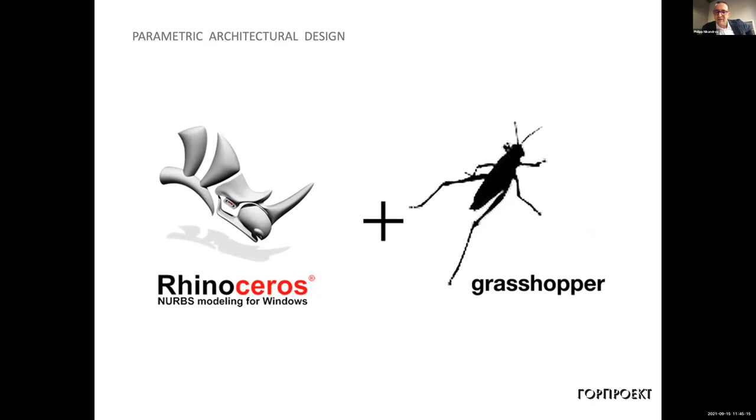Again, we used a lot of parametric architectural design, mainly Rhino and Grasshopper. For instance, daylighting in master planning. For city planning, for arrangement of residential blocks within the district, providing adequate daylighting comfort for each building, for each facade, and for each apartment.

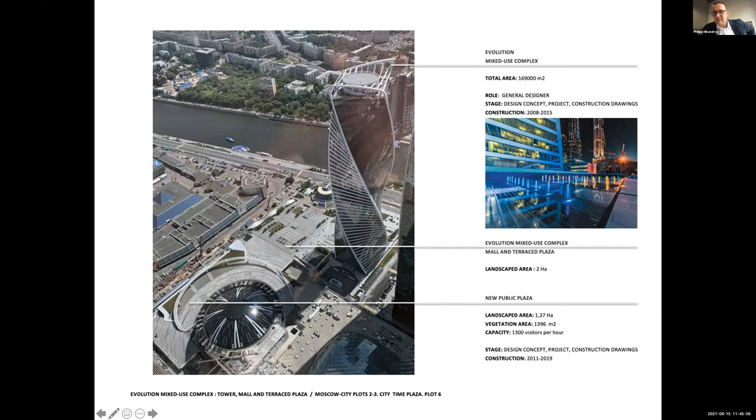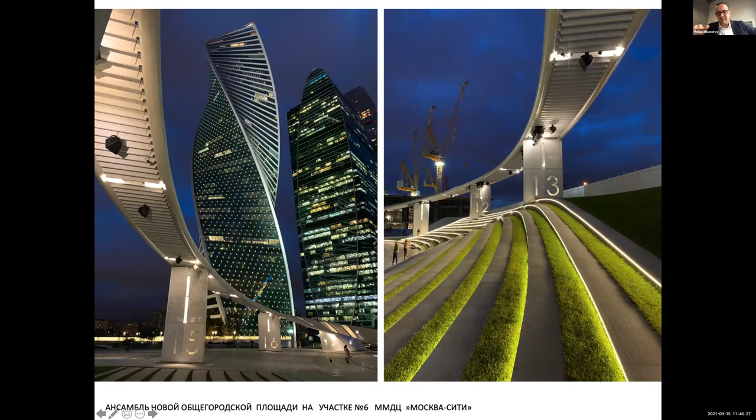So it's actually in 3D. These granite slabs, they're really big granite slabs. They go up and lower in a different pattern. And we designed, invented our own scripts to help with paneling. And finally we have this table of typical panels, and this is how we help to reduce the budget.